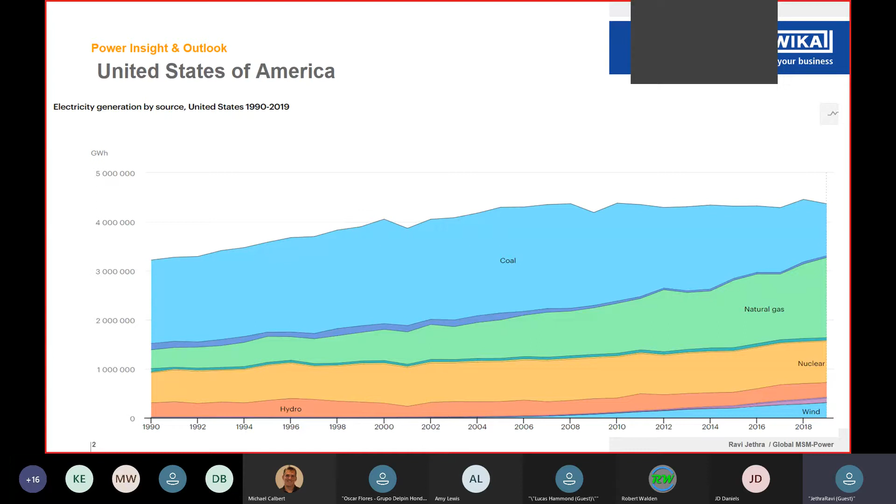So one thing you'll notice is coal is relatively flattening out, and it is probably expected to go down further. Natural gas has been increasing in terms of usage for power generation. Nuclear is relatively flat, and of course the renewables, wind and solar power, and those type of renewable sources of electricity are going up. Wika essentially has products and services that we offer that play into all of these different subsegments. So irrespective of whether it is going to be a coal-fired power plant or a combined cycle, we also have nuclear qualified products. So they can be used in the containment area or the nuclear zone, if you would.

We have strong references for solar thermal as well. Energy from waste, trash burners or incinerator type of power plants, as well as biomass power plants, as more and more power utilities across the nation seek to get a renewables label or a green label. We also have a good installed base in terms of different hydropower plants throughout the country.

Part of Wika's services portfolio is something that we refer to as FAST audit, which really stands for Factory Audit Service Team. It's really an instrument survey that is provided as a service to our customers. And we've done a lot of these plant instrument surveys throughout the country, including for power. And I've myself led some of those instrument surveys.

And so we have a lot of data in terms of the type of instruments that are being used in the plants, and what type of failures occur, or what are the best practices in terms of the various applications, and which devices should be used. And specifically, being the leading manufacturer of gauges, we have extensive data related to different types of gauges that get used in a power plant, apart from the different applications and equipment that they are used in conjunction with.

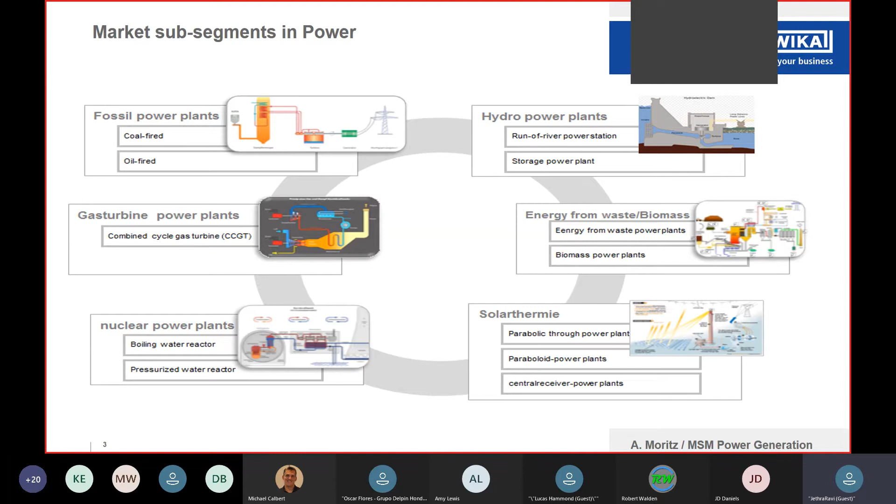A quick top line overview in terms of some of the key products that we provide and some of the applications, and I'll have more information specifically related to the applications in the coming slides. Wika's core competence is mechanical products. We do have quite a few electronic products, and I'll share some more information related to that as well. But specifically on primary flow elements, which is differential pressure flow technology, we provide instruments for monitoring flow of steam, condensate, and especially at the higher temperatures and pressures. We have primary flow elements that do a really super job, that are calibrated. They go through a special calibration process and are kind of seen as the industry standard. And we have strong references related to each of these.

So Wika is known as a gauge company, but part of what I'm going to cover in the presentation is a lot of the other products that we have in our portfolio that lend themselves very well to a lot of different applications in different sections of the power plant. So we have pressure gauges and temperature gauges, of course, but also temperature sensors and transmitters, RTDs, thermocouples, thermowells, and a bulk of what we supply really relates to monitoring pressure and temperature in the heat recovery steam generator or boiler, if you will, but also the gas and steam turbine areas. Those are kind of the major areas where some of the products that we supply get used.

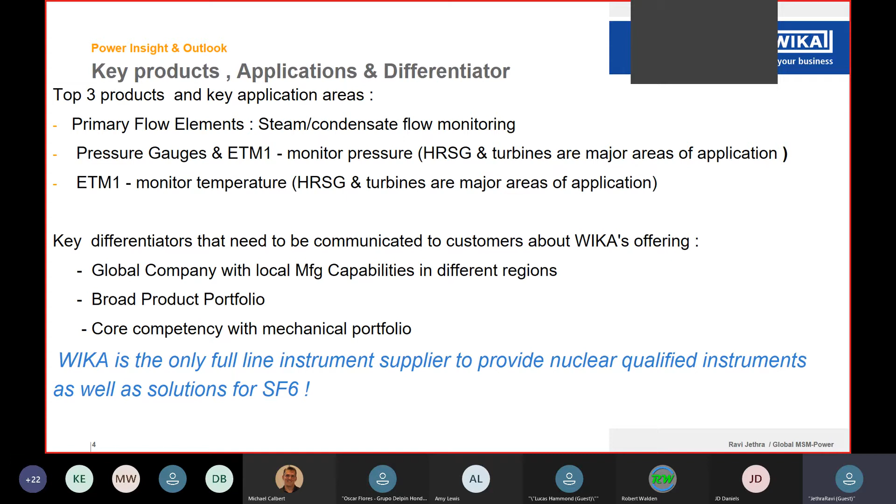So keep in mind, just touching upon some of the application areas. If any of you guys are interested in a deep dive type of presentation on a specific technology, we can have a separate session scheduled for that as well. Just let me know. Primary flow components, primary flow elements.

Like I said, this is really driven by differential pressure flow technology, which is very commonly used, irrespective of the fact that over the last several years, there have been a lot of electronic flow technologies that have come into play, but specifically when it comes to steam and even in a lot of areas related to condensate flow measurement, DP flow technology is still the preferred technology, and there are multiple reasons as I talk to end users related to that.

From an end user point of view, the fact that they can do a lot of maintenance, and in some cases this DP flow is directly linked to operation and validation and certification of steam turbines and overall plant efficiency. In a lot of those areas, it's dictated by different ASME standards or ASME PTC, as they call it, performance test codes.

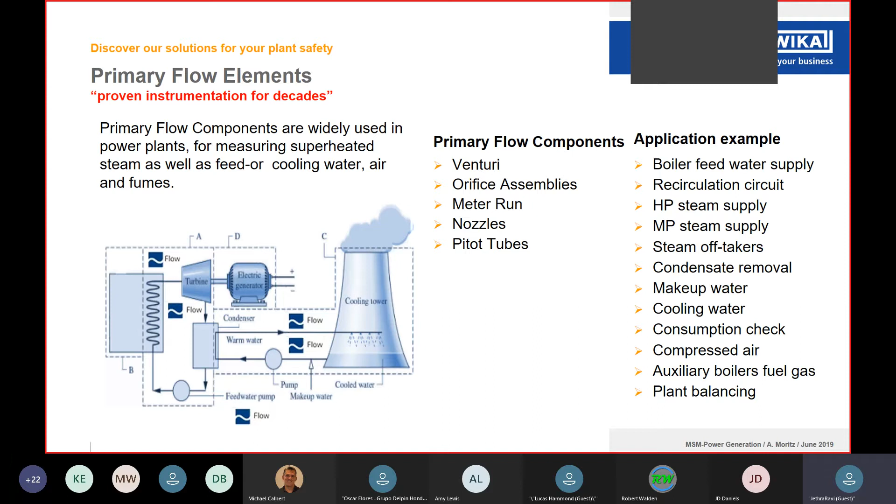Makeup water and cooling water, those are some areas where some of the customers have been using DP flow technology with orifice assemblies or orifice plates, and in some cases, they are switching over to some of the electronic flow technologies. So Venturi tubes and flow nozzles are the bulk of what we supply into the power market, and these are all designed and built in accordance with ASME PTC 19.5 and other relevant ASME standards.

A lot of it really relates to the projects. On some of the international projects, we see more of the ISO standards being applied. So we have our engineering folks that are trained to be able to size flow elements based on the flow characteristic data that is provided by the engineering companies or contractors, and be able to provide the design calculations.

We also have welders that are trained and have to go through an annual certification process each year based on the ASME certification that they have to carry. The certification is also for our machine shop, where all of this welding and machining happens on these mechanical assemblies. So we have a lot of experience both in terms of small as well as large line sizes.

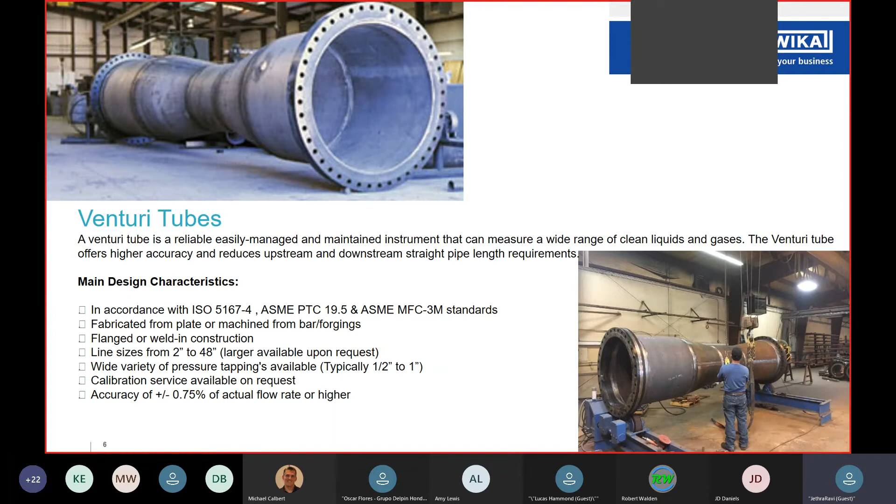In some of the locations, we work very closely with some third-party calibration labs, although in one of the facilities, we do have our own internal calibration lab as well. So we also invite customers to visit some of these labs depending on where the project is happening. We also do third-party calibration. There are a lot of times where some customers reach out to us about recalibration on existing flow elements that they might be using, and we provide that as a service too.

Flow nozzles are another piece of primary flow elements that we provide, and these are specifically designed in accordance with ASME PTC 6. That's the specific standard which dictates how the flow nozzle has to be engineered, calibrated, and even the machining and the welding that happens on these flow elements. And these are used to validate the steam turbines.

So a lot of the HRSG manufacturers as well as the steam turbine manufacturers have specific requirements relating to the flow nozzles that they want to use in conjunction with their equipment. And we have good knowledge and experience in terms of building these flow nozzles to the specific requirements. Over the last few years, we've supplied over 500 of these across the Americas.

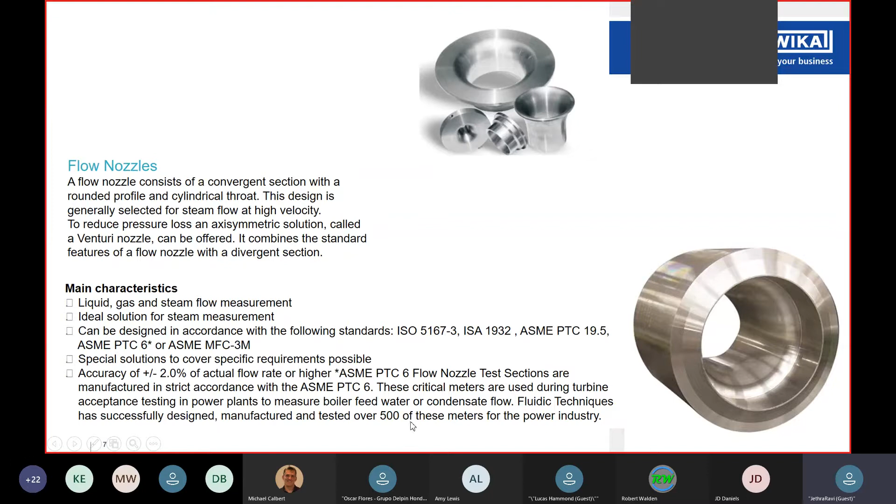One of the things that we are also seeing is being dictated by the renewable energy standards in different states across the country. There is preference for renewable power to be on the grid over conventional or non-renewable power. So, for example, if there is a coal power plant or a combined cycle power plant, they have to run the plant at whatever rating or megawatt capacity is dictated by the grid operator, because they can only put a certain amount of electric power on the grid on a specific day. If they do not meet that requirement, there are very heavy fines imposed by the grid operator.

And what that does is, a lot of these plants are running at much lower capacity than what their plant has been designed and rated for, which basically means that you could have a combined cycle power plant that was rated for 500 megawatts, but because of the renewable power that is expected to be on the grid that day from solar PV farms or wind farms, they might have to run the plant at 300 or 350 megawatts.

And that imposes a lot of thermal stress on all of their high pressure mechanical equipment like the HRSGs, the heat recovery steam generators, the boilers, and a lot of the feed water heaters or condensers, which causes a lot of corrosion and other kinds of challenges for them in terms of how they do their plant maintenance.

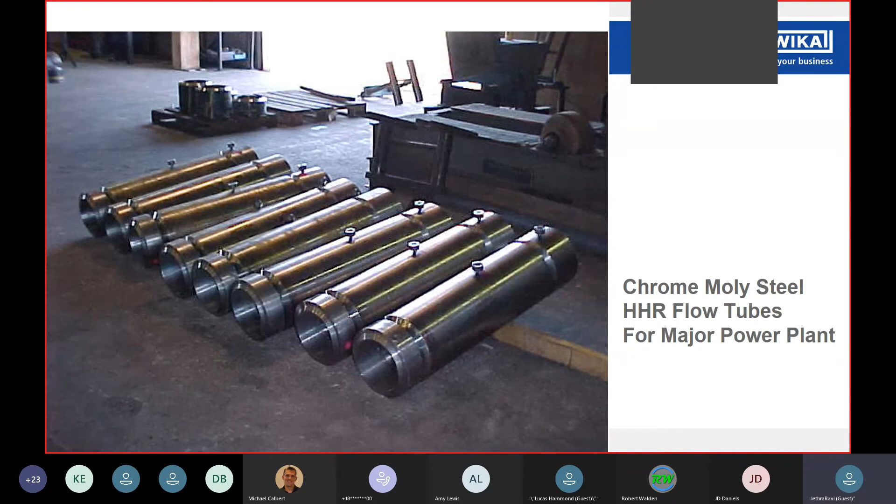One thing that I will also mention is WIKA, apart from providing the flow elements, also has the ability to assemble a complete unit. So it's not just a primary flow element, but also a manifold and/or a DP transmitter. And in some cases, we have also provided orifice assemblies with a differential pressure gauge, because in some plants we've actually received requests where they not only want the ability to install a differential pressure gauge, but also a DP transmitter.

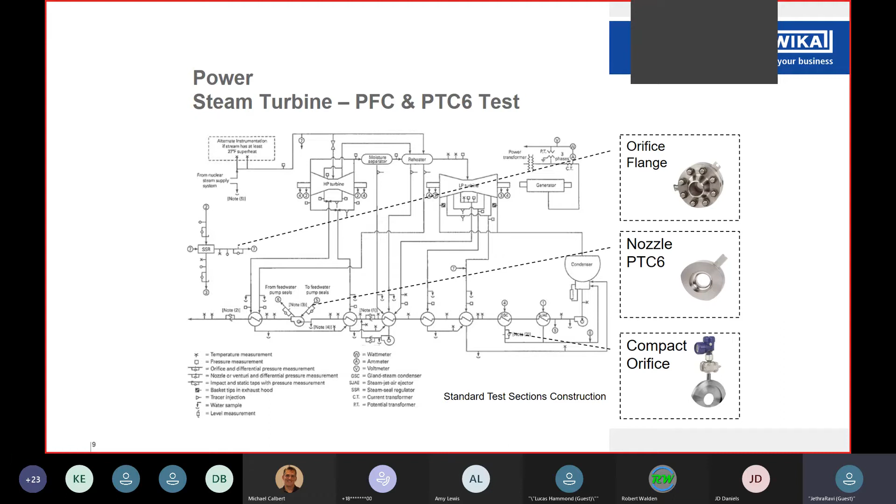So we have the ability to provide all the mechanical fixtures related to that, and/or provide it as a complete package. So we do a fair amount of work with different instrument manufacturers or transmitter manufacturers as well. So that was as far as our flow product portfolio goes.

Moving on to level, again, like I said, our core competency is in mechanical level. We do have a few electronic products as well, and this is an area that we'll touch upon. So our core competence, we provide the mechanical level assemblies, the bypass chambers, or the magnetic level indicators. But we also run into applications where they want to use a mechanical level switch, which is based on reed chain technology. And sometimes customers want a magnetic level indicator with a reed chain type of transmitter.

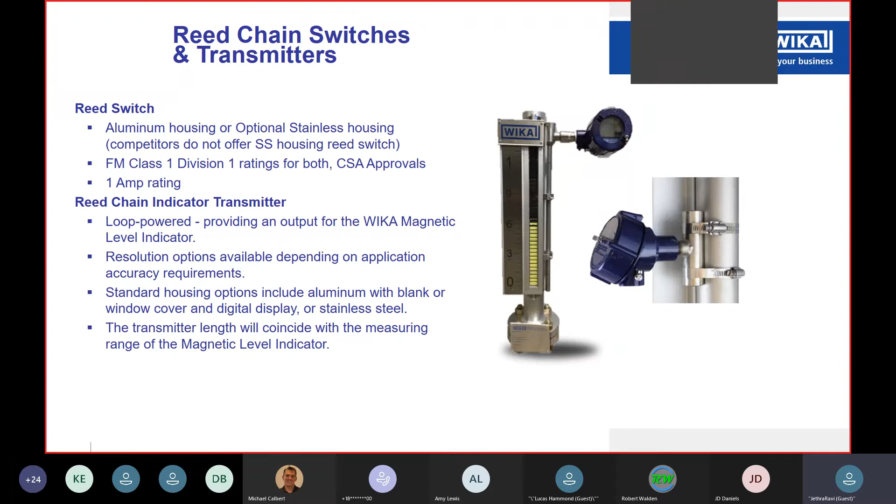So these are not as high accuracy as, say, a guided wave radar, but there are also benefits in terms of the value that it provides based on cost competitiveness, etc. And not all applications necessarily require that high accuracy. So this is again a float based type of technology, and we actually have another product that we offer based on float technology. It's a magnetostrictive transmitter, which can get pretty close in terms of accuracy with guided wave radar, although it may not be as close.

So there are applications where we've provided these, and one simple application that I can think of is a silica water wash storage tank, and also fuel tanks, backup fuel storage tanks. So these are some areas where a very high accuracy device may or may not be needed. And plus, if a mechanical assembly is required for an operator to get some kind of indication from a good distance while he's walking the plant, then it's a good type of instrument to be used.

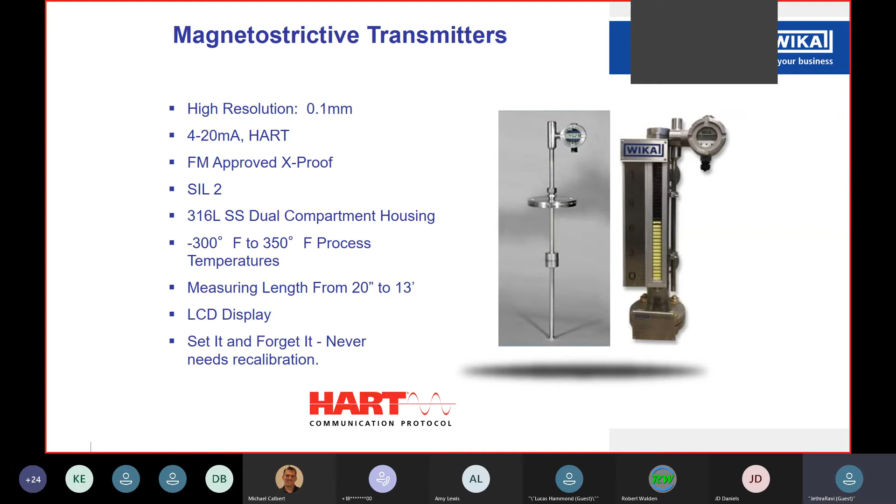We've done quite a few of these where in a lot of plants, they water wash the steam turbines every once in a while, depending on their standardized procedures. And every time they're washing the steam turbines, a lot of silica that has accumulated on the turbine blades gets into the water. So they cannot just get rid of that water after washing the steam turbines. So they store it in a storage tank before it can be sent for water treatment. And that's an area where they've used some of these magnetostrictive transmitters or reed chain type of transmitters with the magnetic level indicators.

We also run into applications where the customer absolutely wants a guided wave radar, and we work with a couple of different guided wave radar manufacturers as well, where, depending on the customer preference, we'll package it together and provide it.

FLW, for example, carries the line of a specific manufacturer. So we do a fair amount of work through those guys as well, where it can be provided as a complete package.

Specifically on some of the systems in power plants, whether it's the condenser or hot well, feed water systems, preheaters. A lot of the plants have triple redundant configurations in place, that kind of system where they need to have at least three measuring technologies or three measurements to happen on a single point, and at least two out of the three readings have to match before the DCS can take any control action.

So we have the ability to provide the mechanical bypass chambers and or the magnetic level indicators as well that would be used in conjunction. And almost all of the times, these are going to be provided or will be using some kind of electronic level measurement technology as well, like a guided wave radar or sometimes a magnetostrictive transmitter. So like I said, we can either do it completely in-house or we work with other third-party manufacturers to provide a complete level solution to the customer.

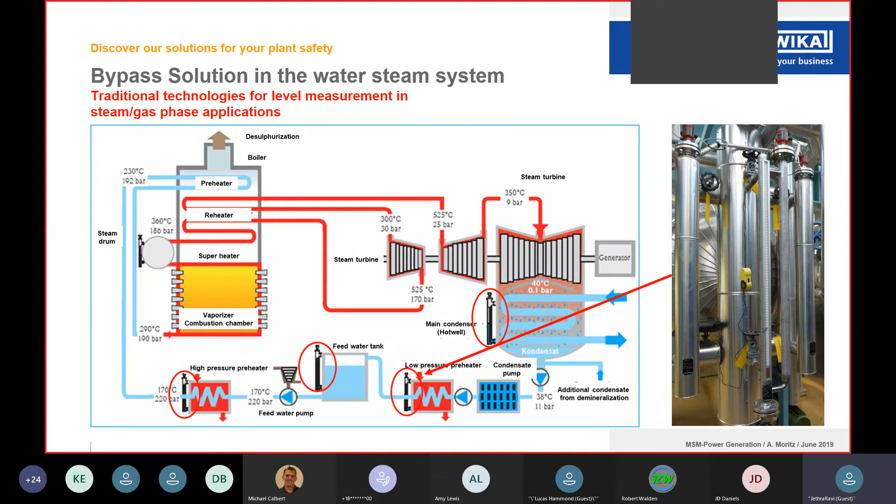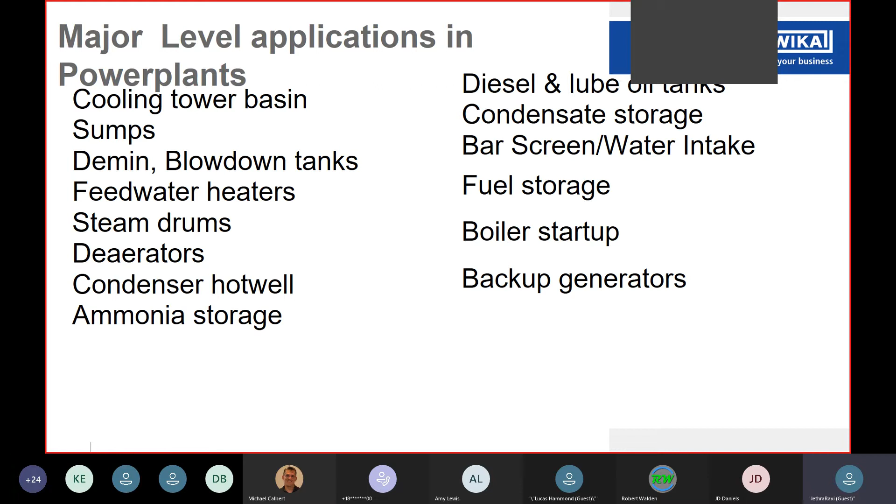So I mentioned earlier about some of the applications that we do, cooling towers, sumps. We also have mechanical level switches that we can provide. In some cases, continuous level measurement is not really of interest. It's really point level measurement or like a switch functionality that is needed. So we have products that we can provide for those kind of applications as well. But these are some of the common areas in terms of level measurement where we provide our products.

Moving on to temperature, like I mentioned earlier, we not only provide temperature gauges, but we also have the ability to provide all different types of temperature assemblies, RTDs, thermocouples, thermowells, and we not only provide the standalone simple RTD that would be used, say, in a cooling tower. We also have the specialty type of tube skin thermocouples that tend to be used for boiler tube monitoring.

So we do a good amount of work with the HRSG manufacturers, the Nooter/Eriksens and Vogt Power, etc. But we also do a good amount of work with contractors or end users when they are doing their turnarounds, because there are occasions when they need to replace some of these thermocouples. So we not only provide the thermocouples, but we also have our people in-house that are essentially service engineers that can go on site and work with the customers in terms of installation and commissioning of some of these boiler tube probes.

Like I mentioned earlier, we also have strong references related to solar thermal as well as hydropower that we can provide. So we have done a lot of work with some of the major contractors and EPCs related to those type of projects.

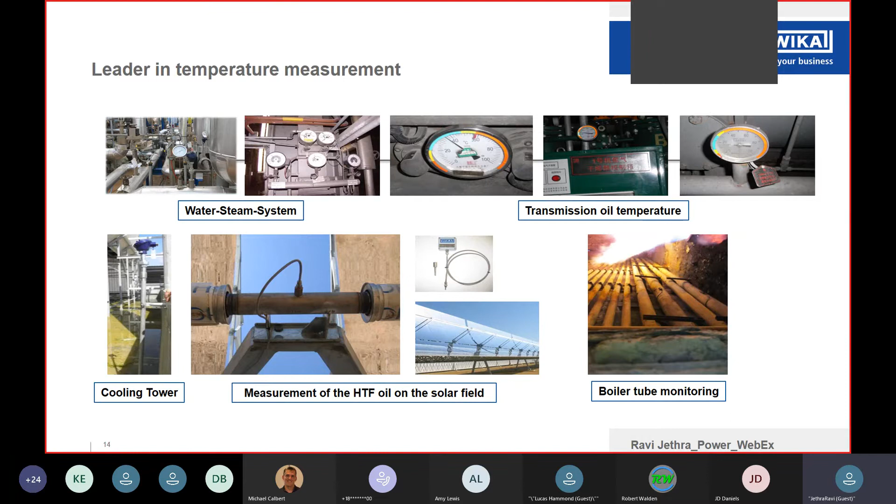And this is just a quick snapshot of some of the different areas where we've provided temperature probes, different applications relating to the water steam system, transmission oil temperatures, cooling towers, also the heat transfer fluid on the solar thermal type of power plants. Bulk of these really are in the southwest part of the United States and different parts of the Middle East and Southern Europe, like Spain, for example. So this is just a little bit more detail on the tube skin type of thermocouples that we provide for boiler tube monitoring.

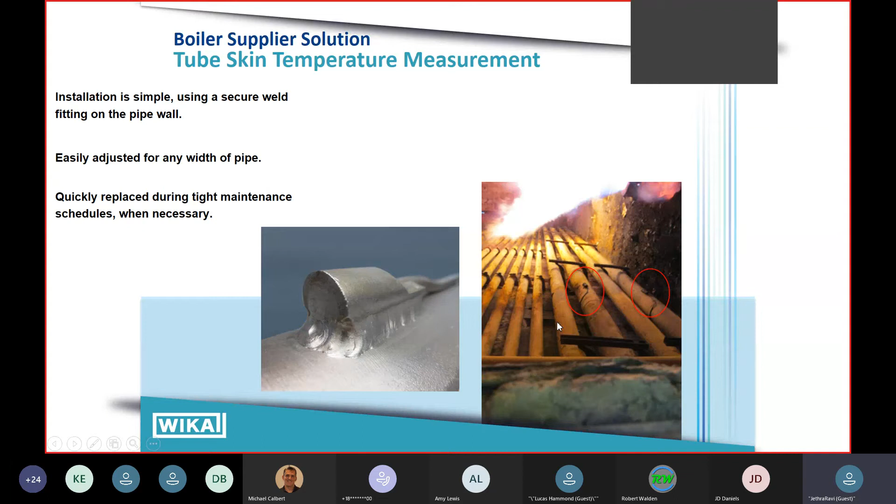We also have specialty sensors that we have developed for a fast response time. So there are areas in a power plant where they tend to monitor the temperature, and they want to make sure that the temperature has reached a certain point, and once the temperature reaches a specific point, they want to open a steam valve as quickly as they can.

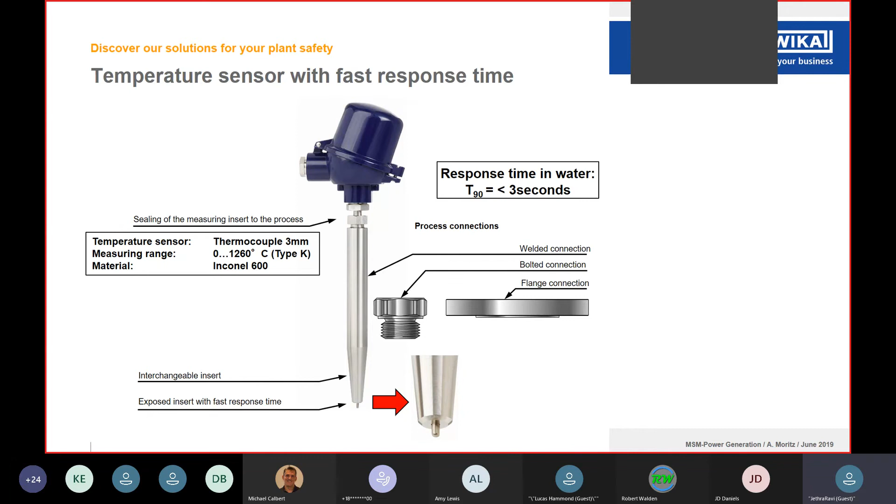So we have what we refer to as an exposed insert, which is essentially it has a thermocouple, but at the end of it, there is a small piece of the RTD element is exposed. So sorry, the thermocouple is exposed, which allows for a much faster response time than what you would typically get. So in a standard thermocouple, the response time is going to be more like close to 7 seconds or something like that. So this is essentially showing like a temperature sensor.

Excuse me, I need to just drink some water.

So the preheater area and the inlet for the main steam on the turbines, they have applications where the temperature sensors are again used in a triple redundant configuration. From an operator point of view, the DCS is monitoring and making sure that at least 2 out of the 3 readings match before they take the control action.

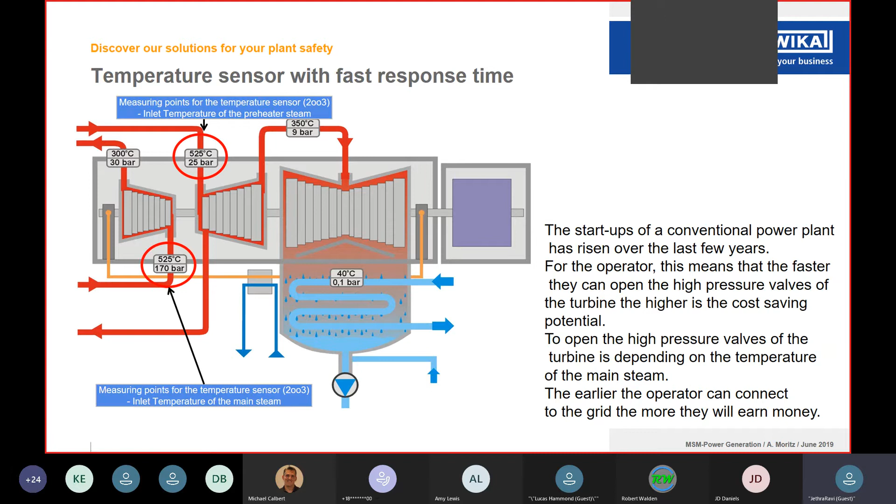But specifically, they have the high pressure valves, and what they want to do is make sure that the temperature has reached a certain point before they open the high pressure valve, but they also want to not lose any time. So the absolute instant that the temperature reaches the specific setting, they make sure that they open the main steam valve.

So moving on to mechanical pressure, like I said, Wika is a company that is known for... all right. Thank you.

One thing that we have seen is, there are a lot of customers that use pressure transmitters, but almost always on a lot of those points, they're also using gauges. And a good question would be, if they're already using transmitters, why do they need gauges? But in all the different plants that I've walked through and the different operators and instrument folks that I've talked to, they almost feel that for just about every transmitter there has to be a gauge, or sometimes more gauges than even transmitters, because in some areas they don't necessarily run wires back to the control room.

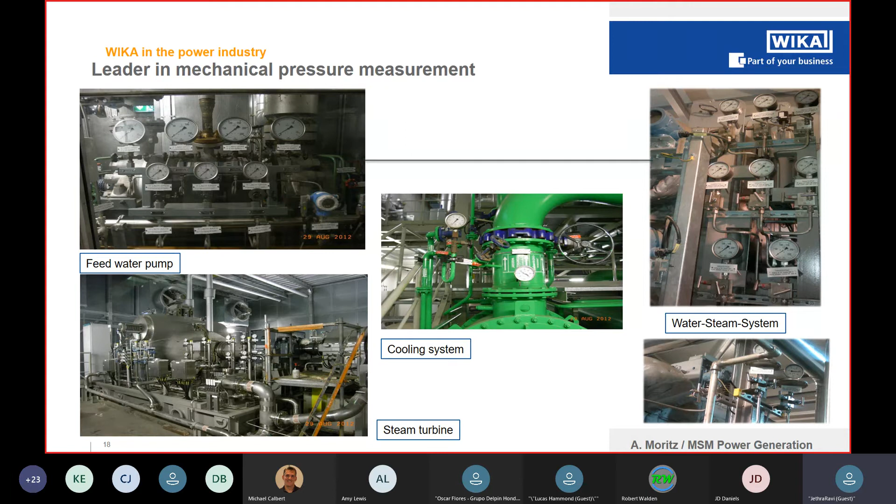So for example, when there's a lot of vibration, we definitely recommend to our customers that they go in for a liquid filled gauge versus just a dry gauge. So we have a standalone presentation that we do on those type of topics as well.

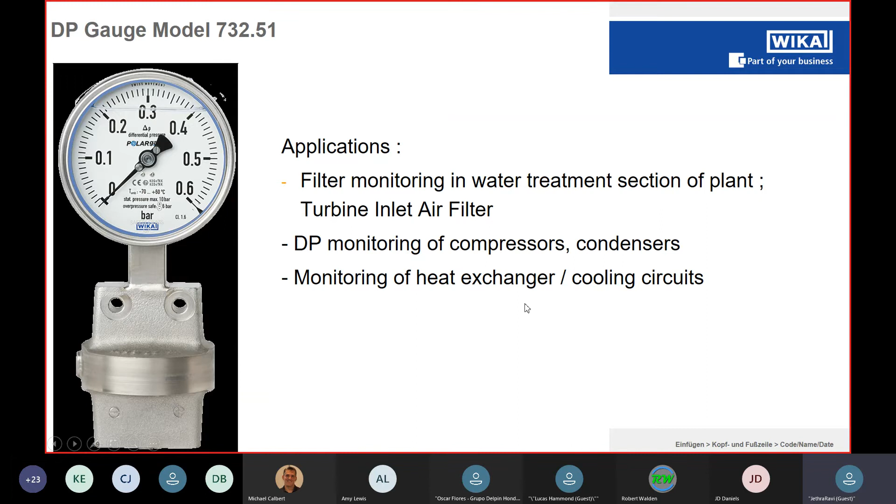Temperature gauges, like I mentioned earlier, apart from RTDs and thermocouples, we also offer temperature gauges, or what are commonly known as thermometers. So we have gas actuated thermometers. We also have bimetal thermometers.

One thing I also wanted to mention, you will see different ASME standards being referred to. Wika is one of the very few full line instrument suppliers that has its own people serving on different committees. ASME B40 was one of the standards that was developed with regards to gauges, and we had some of our engineers on some of these committees. So that gives us an insight in terms of what these standards are referring to and how best to design and develop the product, so that from a customer point of view it meets the most stringent requirements.

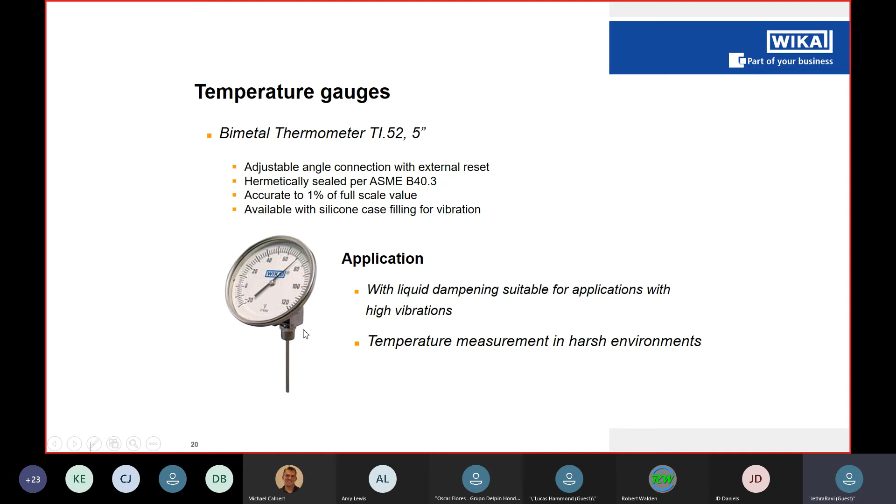So this is again basically showing one of our newer bimetal thermometers with liquid dampening that is designed for high vibration. And one thing that you will notice is that the display or the dial of the gauge can be rotated to a certain degree. So it allows for flexibility in terms of the installation.

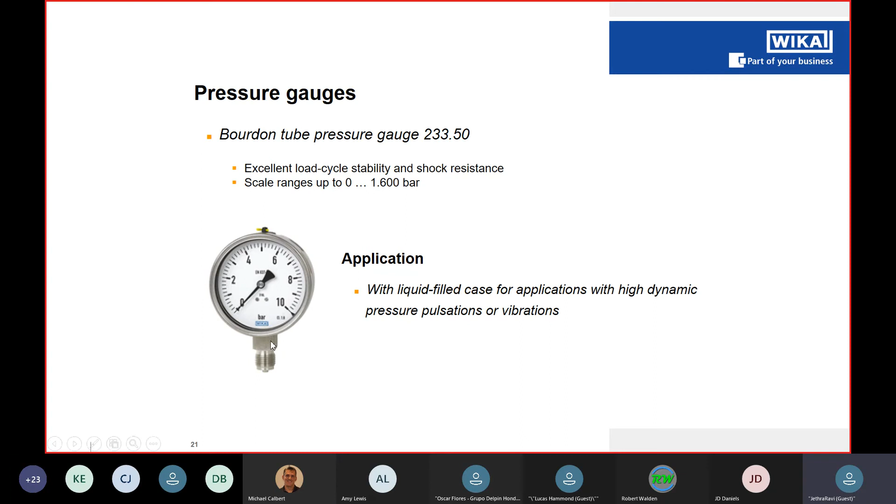This is again in terms of Bourdon pressure gauge, the 233.50 as well as 232.54. I know these part numbers might sound a bit confusing, but you don't have to memorize this because we can work through based on the spec sheet that you guys might have. But those are some of the very common models that we offer with regards to gauges.

We also run into a lot of requirements where customer wants a gauge but also wants like a switch output in conjunction with a gauge. Like I said earlier, there are a lot of customers that are using pressure transmitters, and there are also a lot of customers that, apart from using pressure transmitters, want gauges. And a lot of the areas they also want gauges with switches. So we have the ability to provide that as an integrated unit.

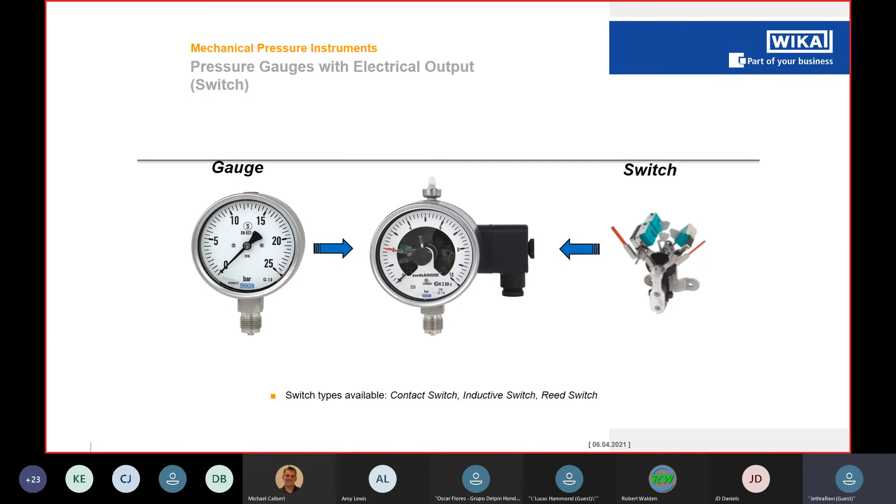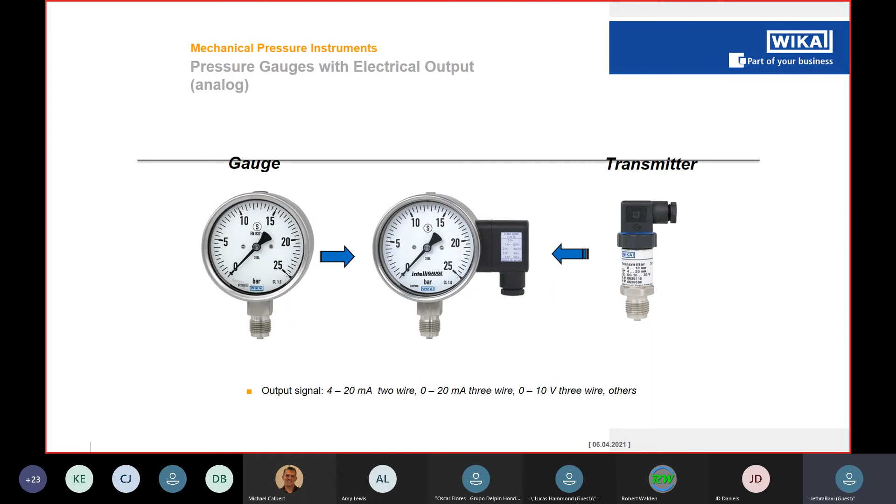Specifically in power plants, I've seen a whole bunch of these being used in the water treatment section because there is a good amount of panels or skids in that particular area. Also lube oil skids, that's another area where we tend to provide a whole bunch of these gauges. Again, we've also run into requests where customers want a gauge, but sometimes they also want a transmitter. And so we have the ability to provide that functionality as well.

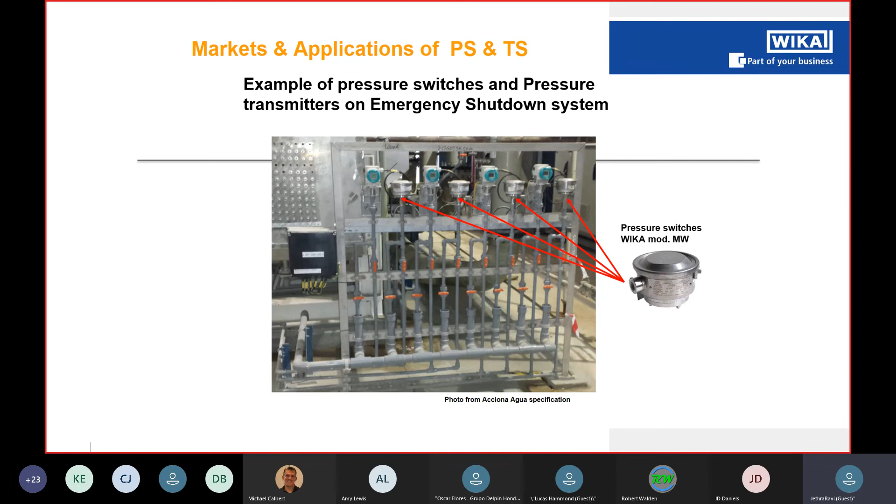We also provide standalone pressure switches. So again, we see a shift towards electronic pressure switches, and I have a slide. I'll talk about that. We offer those as well, but we do offer mechanical pressure switches. So this is our electronic pressure switches. Again, I've seen these more on standalone small skids or panels or standalone systems relating to air tanks or simple applications.

But you're not really going to be getting a relay. It's an electronic pressure switch, but there's like an NPN type of transistor. It's an open collector output that you can get, which gets hooked up to a PLC.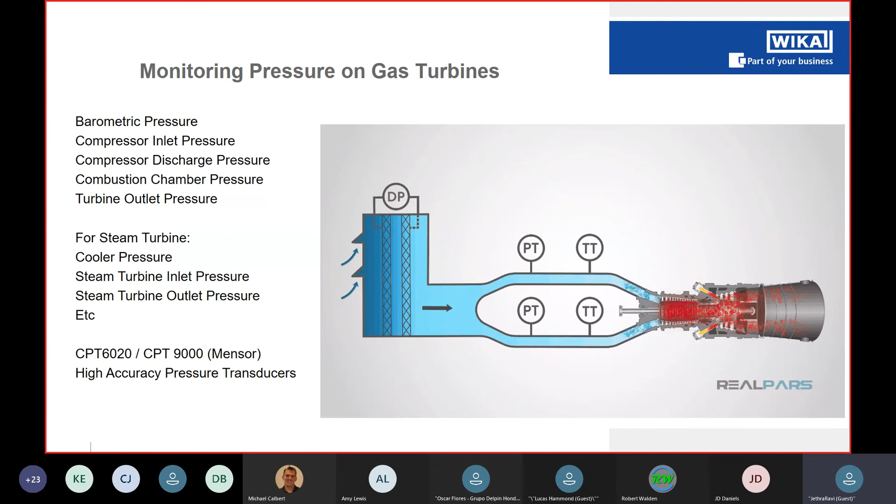A lot of these are used more on research and test stands by different turbine manufacturers, but also in some cases in terms of power plant end users where they might be running their own testing on different plants like pilot plants, etc. Just going through a couple of quick and easy applications.

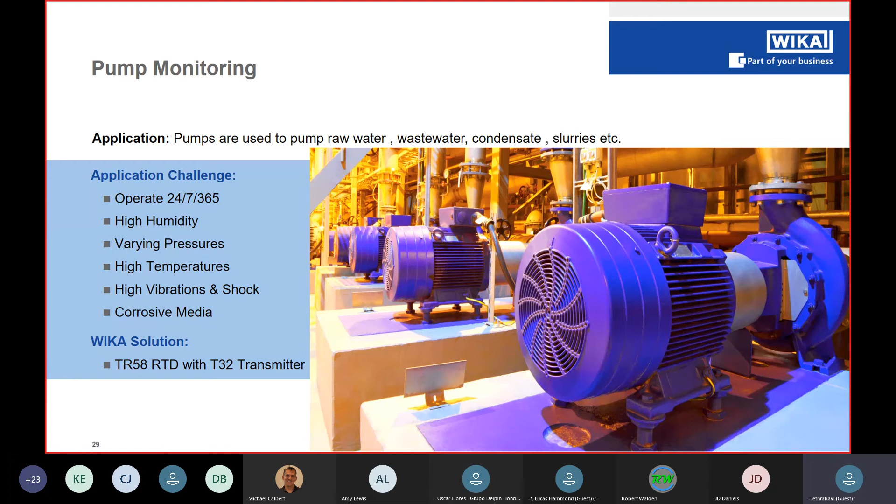So pump monitoring is a very common application in a power plant, and we essentially provide TR58, which is an RTD that is customized to be like a bearing temperature RTD. So it keeps track in terms of what the vibration levels are, and it's designed to withstand the high vibration that it'll have to see. So we provide this with a hockey puck transmitter.

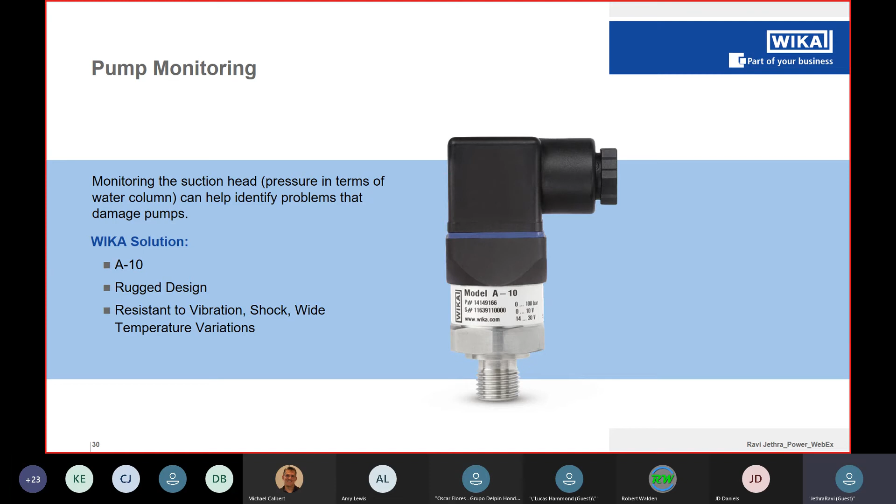On pumps, they also like to monitor the suction pressure, in some cases also the discharge pressure. So we have a couple of pressure transmitters that are small, compact. They don't take up a lot of space. They don't really have a display, but typically in some of these applications, the customer doesn't necessarily need a transmitter with a display. So we have the ability to provide this. It's a very competitively priced unit, also a small footprint. So apart from gauges, we can provide this as well.

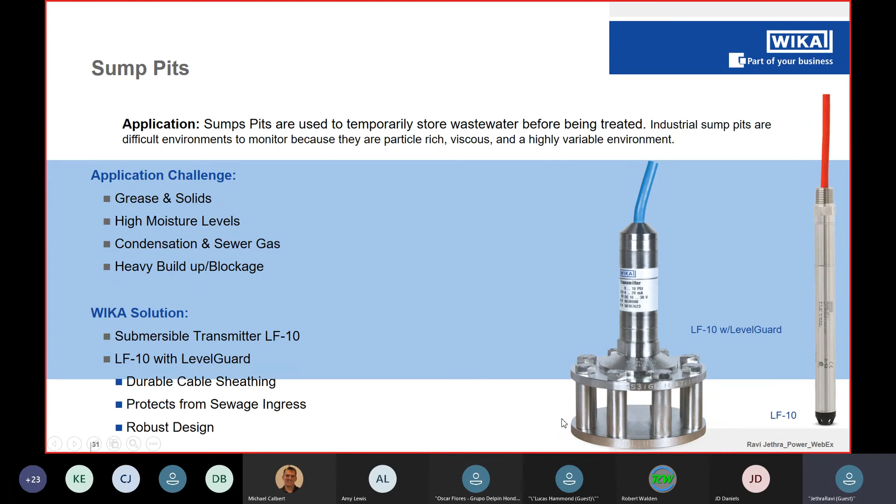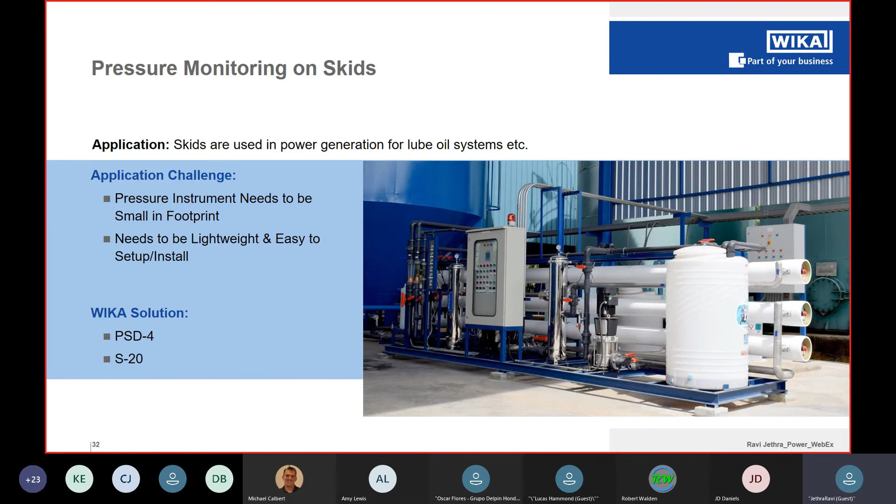So just a few things to keep in mind. I mentioned earlier about skids, lube oil skids. This is like an RO skid that's being used in a water treatment section of a power plant.

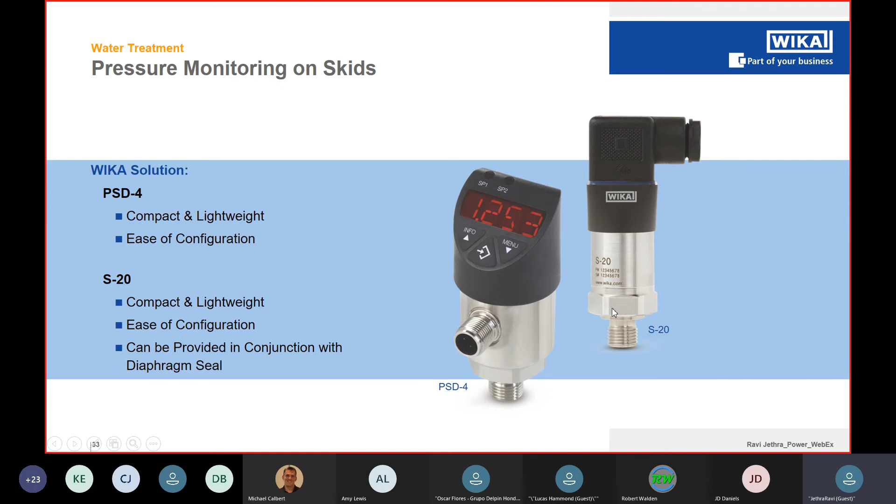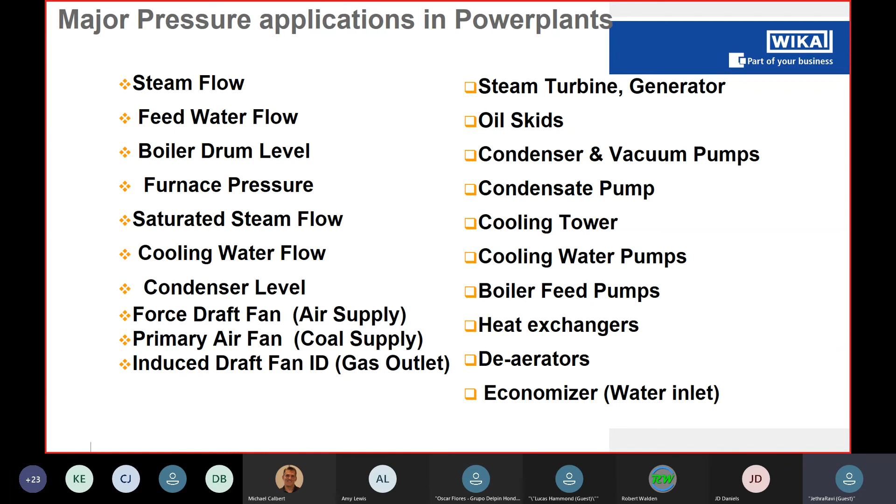So we have devices, like I mentioned, apart from gauges, we can provide the PSD4 electronic pressure switch, but also apart from A10, we also have another relatively small compact transducer, which is competitively priced, called the S20. Some of the very common applications that we do in power plants, whether it's electronic pressure transmitters or with gauges or DP gauges.

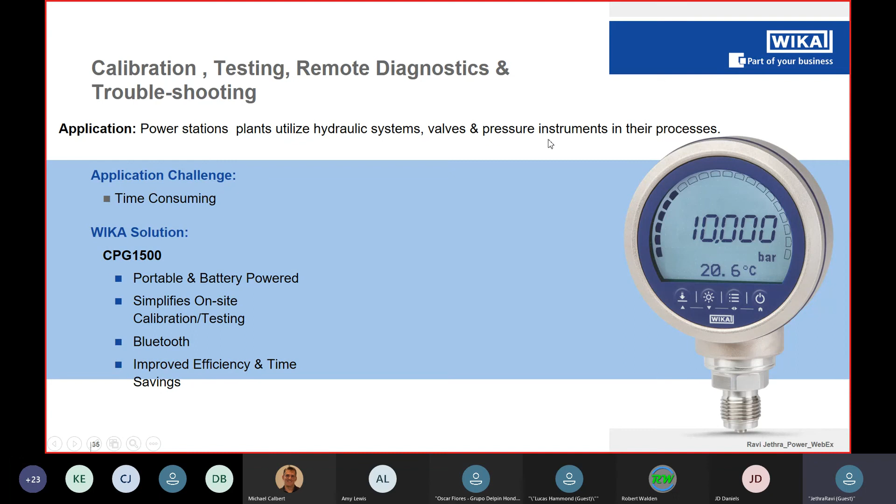In a lot of the power plants, specifically in coal or hydropower, they use a lot of hydraulic systems. That's where they need to check and validate those systems every once in a while. And that's where these types of devices get used. Valve testing is another area. This is also a much higher accuracy. So a lot of the plants also use it like a high precision test gauge, if you will.

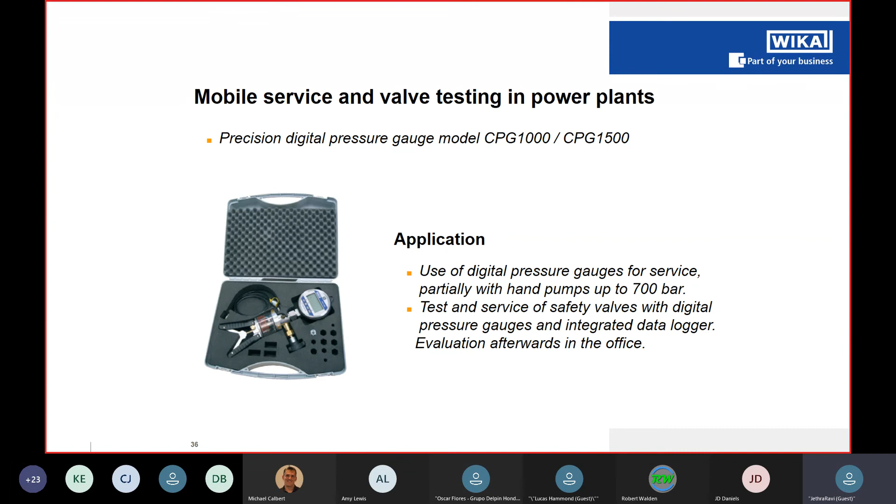We actually supply a couple of these digital gauges. So they're the predecessor to the CPG 1500. That's the most recent one, is CPG 1000. And this kind of shows a fresh picture. So we actually have the ability to supply it like a complete test kit with a hand pump and everything. So it simplifies things for the operator when they have to go on site and test a system, a valve or a hydraulic system, or calibrate a pressure transmitter or some kind of other pressure instrument that they might have. This is an application.

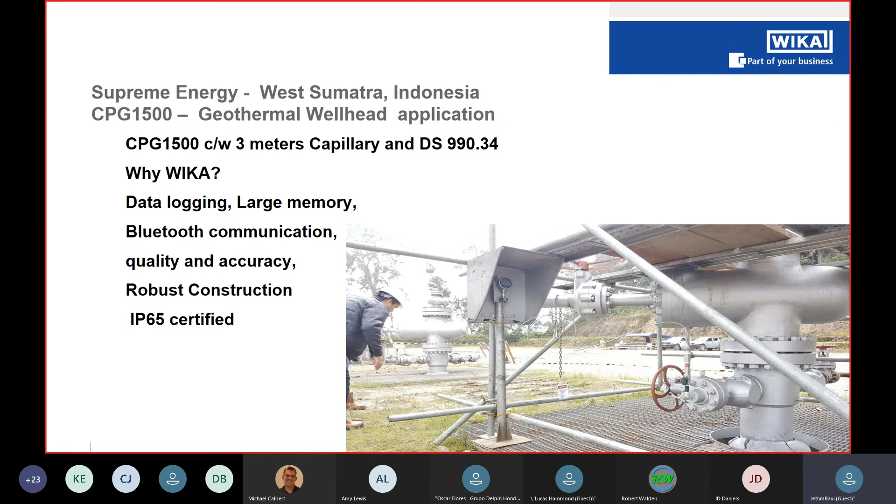And every once in a while, the operator can go and download the information into his laptop or Android or iPhone. And there's an app that's available. And they can go back to the shop and analyze it for what the readings are, or keep it as part of their record.

We also have the ability to supply a complete pressure instrument loop, if you want to call it that, or a point where we not only supply the pressure gauge or transmitter, but we also supply the 3-valve manifolds and or 5-valve manifold if the customer wants to install both a gauge and a transmitter on a single line at a point. We also supply some of the small needle valves, ball valves, double block and bleed, etc.

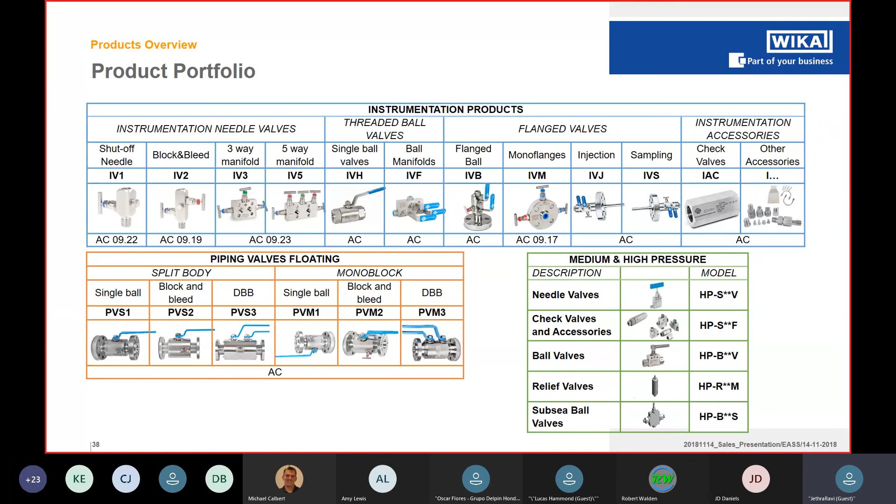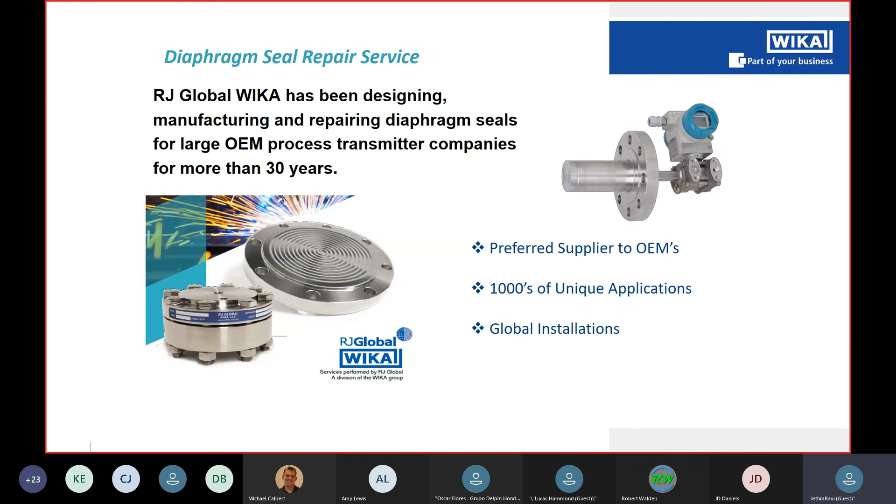Diaphragm seal repair service. Wika is also one of the largest diaphragm seal suppliers in the world. But we also do a lot of repair work, not just for diaphragm seals provided by Wika, but also by other third-party manufacturers on anybody's pressure transmitter. And there are a lot of times where it has actually saved customers a good amount of money, because it can be a fraction of the cost to repair or replace a diaphragm seal rather than replace a complete transmitter. So that really summarizes and completes the presentation.